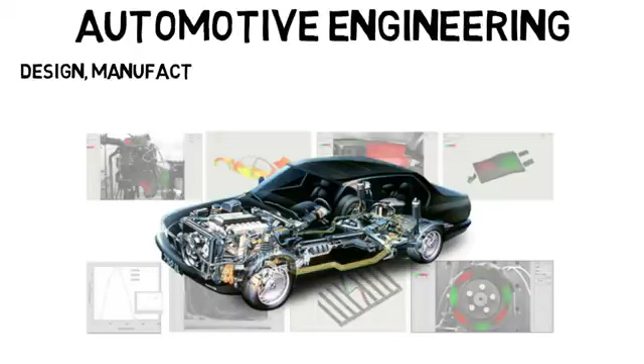This video is going to cover automotive engineering, how to get into the field, and a few examples of what's going on in the field. But first, let's define some things. Automotive engineering is about the design, manufacturing, and operation of cars, motorcycles, trucks, and other automobiles.

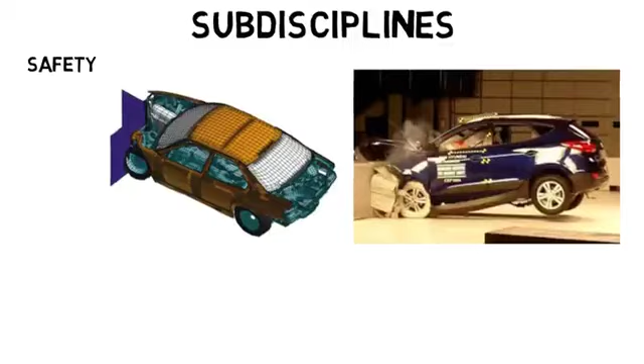There are a lot of subdisciplines within automotive engineering, and there are many things you can work on when it comes to an automobile. For example, you could work on the safety aspect in assessing various crash scenarios, whether it be on the computer to doing actual crash testing. Cars need to meet certain standards to protect the driver and passengers. The frame of the car would have to be designed properly such that energy from a crash is absorbed or moved away from the driver.

Like I said in a previous video, cars are meant to crumple in an accident as engineers design them like that to save lives of the people inside. If the car was extremely strong and no damage was done to it, all that energy would be transferred to the people inside. There's performance in analyzing how fast the car can accelerate, how quickly it can come to a complete stop, which of course is important, and more.

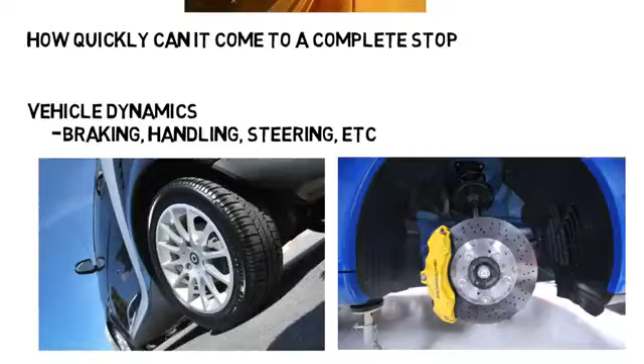There's vehicle dynamics and looking at things like braking, handling, and steering and how the vehicle will respond. The engineer who works on this would have to analyze or design the braking, the tires and wheels, suspension, they could work on the frame as well, and more. There's the fuel economy where you look at fuel efficiency in miles per gallon and test car emissions such as hydrocarbons, carbon monoxide, carbon dioxide, and so on. But of course this wouldn't be the case for electric vehicles.

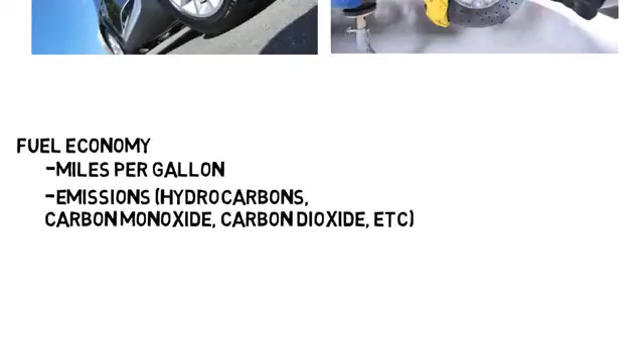There's the shift quality where you focus more on the transmission, the durability of the car, electronics, and much more. Overall, just note that there are many components to a vehicle. Common jobs would be like designing on the computer, testing, and actually working with a physical vehicle, or even manufacturing where you help with the making of the vehicle and its components.

Now when it comes to college, automotive engineering is rarely offered as a major, at least for undergrad. The most common major to go into is mechanical engineering, and then you would pursue careers in the automotive industry, or you'd get your master's and even PhD in automotive engineering. But that's not the only option if you want to work on cars.

I said before that materials engineers can work on cars, electrical engineers can work on cars, especially with electric cars becoming a thing. Computer scientists are even needed for self-driving cars to write the programs for the autopilot as an example. And there's even mechatronics, which may be its own major depending on your school, or it's just a subfield of mechanical engineering, but this can lead you to working on the car control systems and similar aspects. And these are just to name a few. So you can work on cars through various majors, but mechanical is just the most common one people think of, and it also depends on which aspect of the vehicle you want to work on.

Now a huge area of research you probably all know of is self-driving cars. Companies like Tesla, Uber, Google, Toyota, Ford, General Motors, and more are all aiming to get self-driving cars out on the road. Now we do have self-driving cars right now, but there are restrictions to them, and at the moment we are still waiting for a fully autonomous vehicle that's available to consumers. But Elon Musk says that we should have a self-driving car that can go from LA to New York completely on its own in the near future.

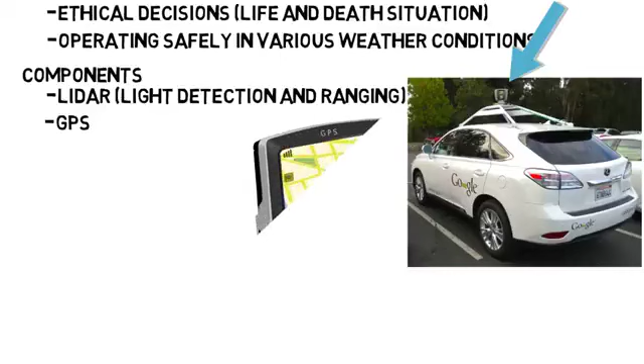Just to name a few, there's the LiDAR, or light detection and ranging, which basically uses light to detect surroundings and is what you see on the top of the Google car here as an example. There's the GPS, which the car uses to navigate to its destination and so that it knows where you are. There's the radar system, which is also used to map out the surroundings, but using lower frequency waves than light, or what the LiDAR uses. And this has its advantages. As one example, LiDAR will not work with heavy fog, whereas radar will.

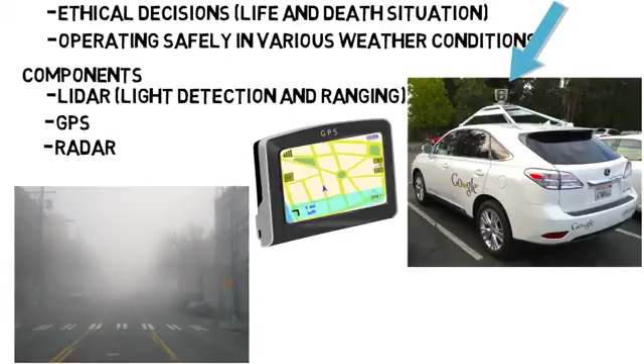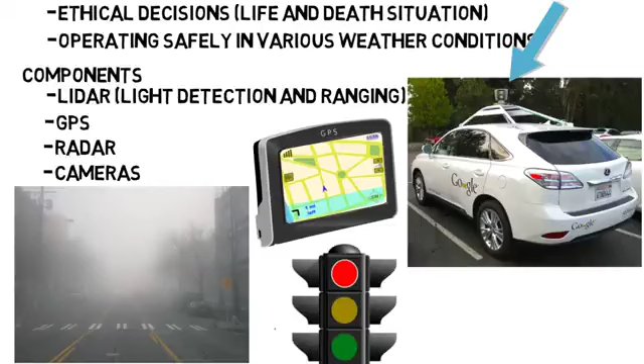And then there's cameras, which read the road and the surroundings as well, but they can also read traffic lights. And research is going into putting these together with even more components to make a safe self-driving car. But even though self-driving cars seem to be the main thing happening, other aspects of cars are also trying to be optimized.

Take the new Audi A8 suspension. This new suspension system incorporates an electric motor for each individual wheel. There's a camera on the front that reads the road and detects bumps so that the air suspension can coincide with those bumps, and with those precise reactions, you can nearly eliminate vibrations. Working with the camera and transmission of data could be worked on by an electrical or maybe computer engineer, but the suspension system itself and doing tests on vibration would be something a mechanical engineer would do.

There's research going on materials that aim to make lighter but safer cars, and this may involve looking at different types of metals that have different properties like varying strength and density. A lot of the metals in cars today did not exist just 15 years ago, and we are still continuing to make advancements in this area.

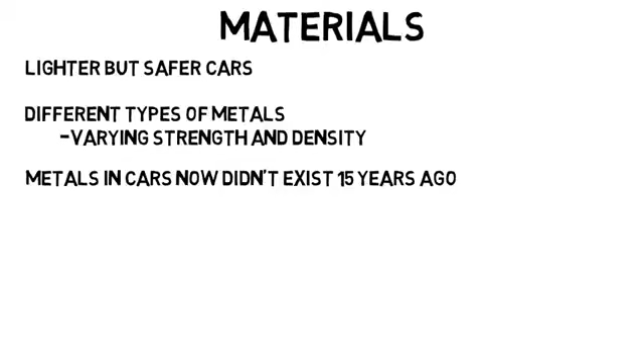Now, just to show again how much there is to work on, I found a Forbes article that I linked below that's titled, "What Will Mechanical Engineers Do After Most Cars Go Electric?" Which is a fair question because electric cars don't have an internal combustion engine, and so are the mechanical engineers needed? Well, of course they are. Even though mechanical engineers do work on engines, most of them work on other stuff.

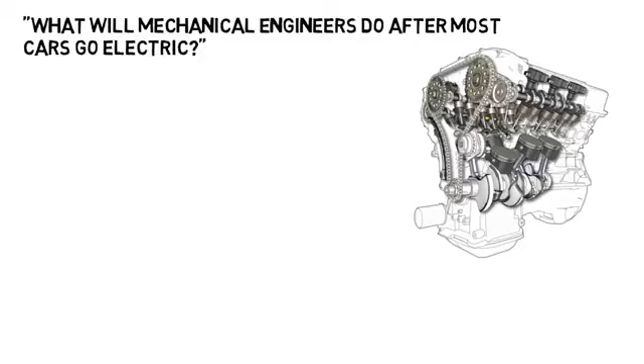Think about what a car really has. The airbag, the trunk mechanism, the suspension, shock absorbers, the frame of the car, the windshield, and even the windshield wipers. Everything that a car has, someone, and usually multiple people, have to work on, design, test, and manufacture.

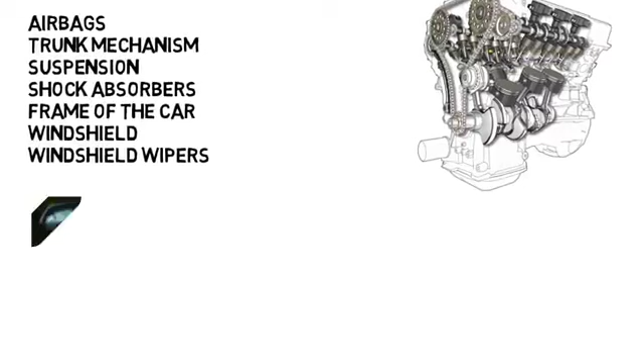The article even really shows you the detail when they say how even the plastic taillight cover had to be made accurately and economically so that it could fit the car. And another engineer even had to design the machine that makes that taillight. There's so much more detail than you may think about all the things that we use. So yes, mechanical engineers are of course still needed.

Now when it comes to companies you want to work at, you may think of some of the typical ones like Honda, Toyota, Ford, Tesla, and so on. But there are also suppliers for these companies, and I saw multiple articles state that you might even do more of the cool design work at those places that you probably haven't heard of.

For example, take Honda. Huge company that I'm sure everyone watching knows of. But do you think every single part of a Honda is made by them at their plants? Because they actually are not. Many other companies help with certain parts, and I'm sure most people haven't heard of the majority of these companies.

According to Investopedia, AGC Automotive supplies Honda's windshields, Takata supplies their airbags, BorgWarner supplies the automatic transmission systems, Automatic Spring Products supplies the seat components, and there are more. So even if you don't land the job at Honda or Toyota, just realize how many more companies there are that you can work at.

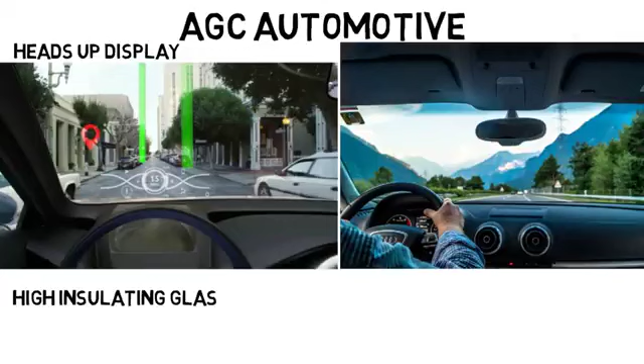Now something like windshields may not sound very exciting, but if you go to AGC Automotive's website, which I said is the company that supplies their windshields, and look at their products, you'll see a lot of things. Things like heads-up displays on windshields, which basically display dashboard information on the windshield so drivers can stay focused on the road. There's high insulating glass for heat transfer optimization to maximize comfort. They're trying to make lighter windshields to help improve the car's MPG by reducing weight.

And they're even working on glass where with the press of a button, you can control how much light and heat comes in, which helps reduce the need for AC. So when people say they want to work on cars, just realize there's way more to it than you may think. You may help design the overall concept of a new vehicle, but you might help design the windshield, the suspension, the frame of the car, and various other specific aspects of these vehicles.

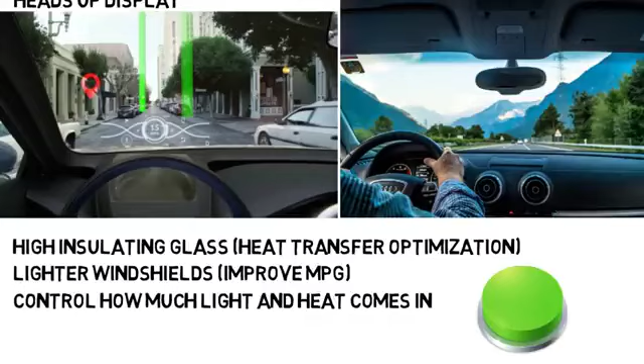In college, you want to make sure you also get involved in automotive projects. Look into joining the Society of Automotive Engineers, or SAE, which your school might offer. Then you'll be updated on competitions you can participate in.

So I hope this gave you a general summary of what automotive engineering is and what you can expect in the field.